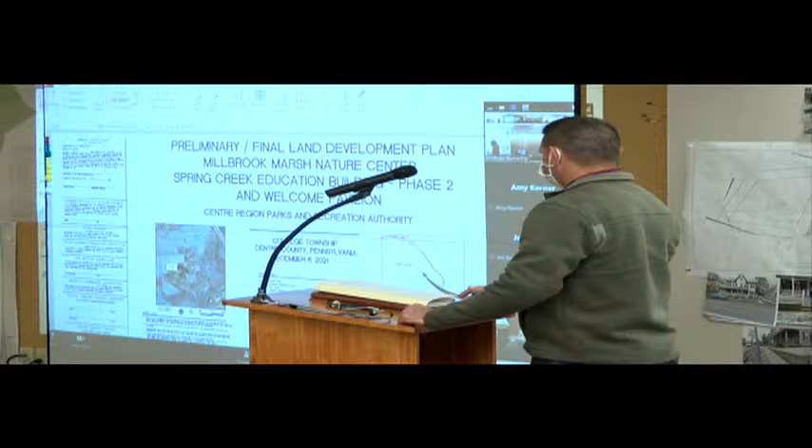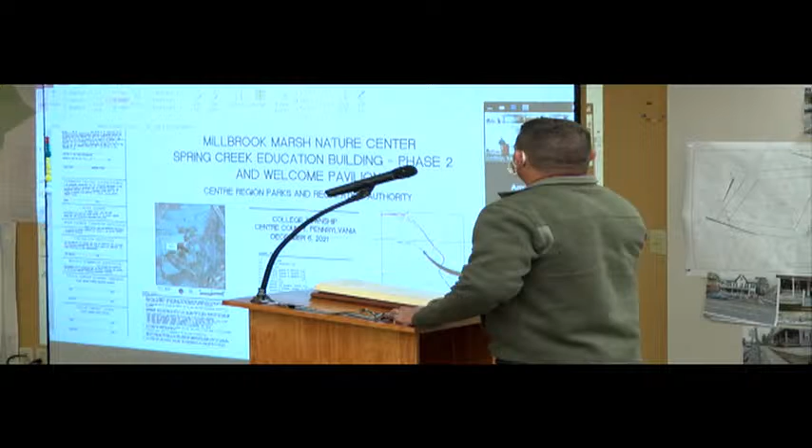I think everybody might be familiar with the project, but just a real quick overview. It's a phase 2 development of the Spring Creek Education Building at the Millbrook Marsh Center. It also includes the construction of a welcome pavilion that has some restroom facilities in it as well. The land development plan itself went in front of Planning Commission on November 16th.

And we did get some conditional approval through Planning Commission at that meeting. There were some additional comments that need to be addressed as far as the land development plan goes itself. We have made most of those revisions as recommended by the Planning Commission. There were some additional comments received on Monday from Lindsay that I went through and responded to today, sent that over to Linda, but Dawn said that information did not make it back into your packets for tonight's meeting, so I apologize for that.

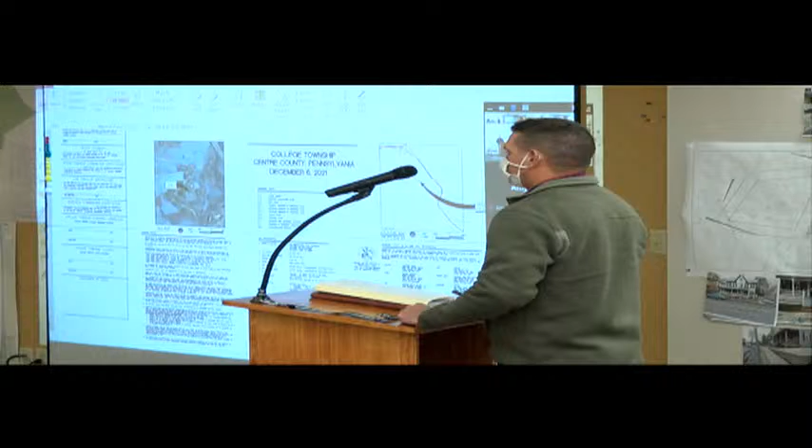There is one area, based on the recommendation from Planning Commission to Council, that we did want to have a discussion on, if possible, which would be the use of the trail surface aggregate on the trail network within the park. As it's proposed right now, the whole network throughout the Millbrook Marsh Center was approved as an alternate to the sidewalk requirement for the ordinance.

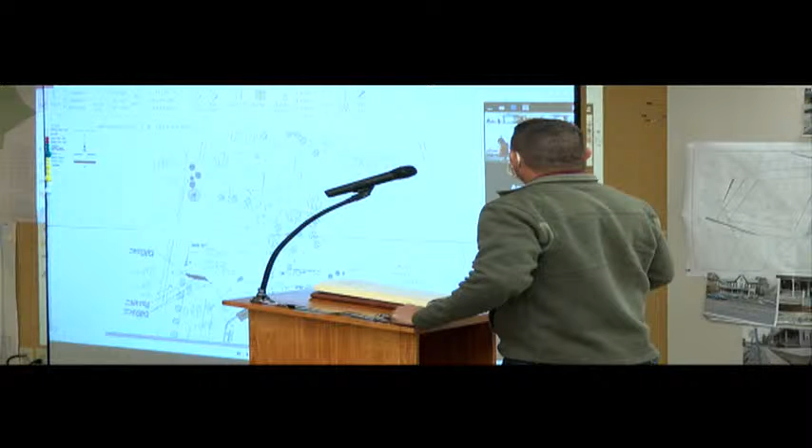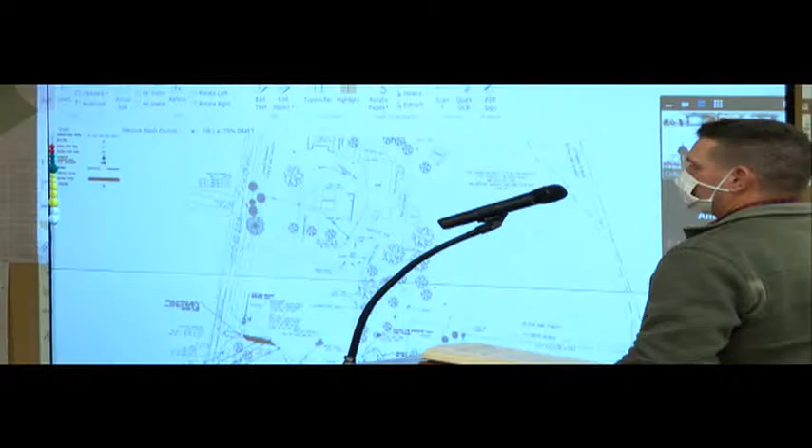Along with that, we were proposing to upgrade the existing trail leading into the Welcome Pavilion. There was a couple areas just on the north side of the facility, or the center itself, that had some grass growing through the existing trail. Basically, it's a maintenance item that we want to go through and upgrade the trail surface in those areas, as well as new construction around the Welcome Pavilion itself.

I know that Planning Commission had a strong conviction on that surface of the sidewalk being either asphalt or concrete. But we do believe, based on information that's been presented by Penn State's Dirt Gravel Roads Center, as well as some other technical bulletins, that the trail surface aggregate is an acceptable surface that meets ADA compliance requirements. That was a concern of the Planning Commission, as well as some of the hardness issues that I think lends itself to using asphalt or concrete.

So the TSA itself does, in our opinion, kind of fall in line with the requirements of an asphalt type surface. Like I mentioned, I know Planning Commission is recommending that trail surface aggregate not be allowable. But based on the Penn State Dirt Gravel Roads Center, as well as additional research information and technical bulletins, that should be permissible given the application for the Nature Center and the history of the Millbrook Marsh Nature Center as a whole.

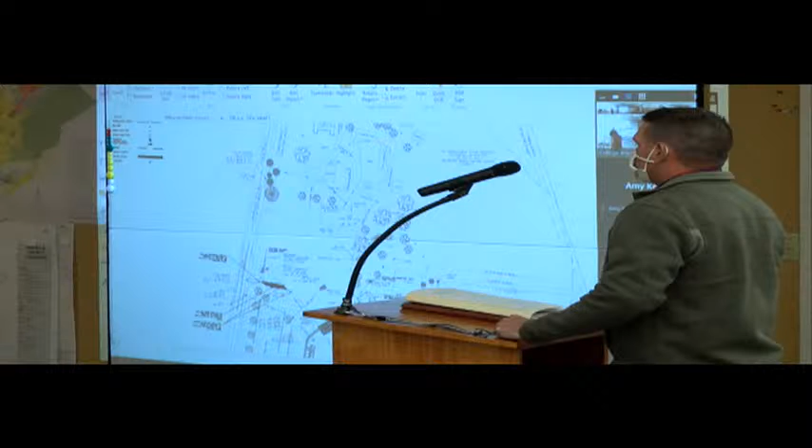But I just wanted to bring attention to the use of the trail surface aggregate. We're requesting that the plan be approved, making sure all comments are addressed as per Planning Commission, with the exception of being able to utilize the trail surface aggregate within the park itself as presented on the plan. So if there are any other questions, I'll be happy to try my best to answer them.

Okay Jeff, thanks. Adam, correct me if I'm wrong, this is the first time we're seeing this, right? That's the first time for council.

Jeff, do me a favor. Since this is the first time we're seeing it, we kind of focused on the items around conditional approval. Can you give us a very brief overview of the project? And then follow that up, if you could tie in visually the references here to where the sidewalk would have been required. So what you're asking for is the waiver, and where the alternate is going, which is part of the condition. And then I think you covered the aggregate part pretty clearly.

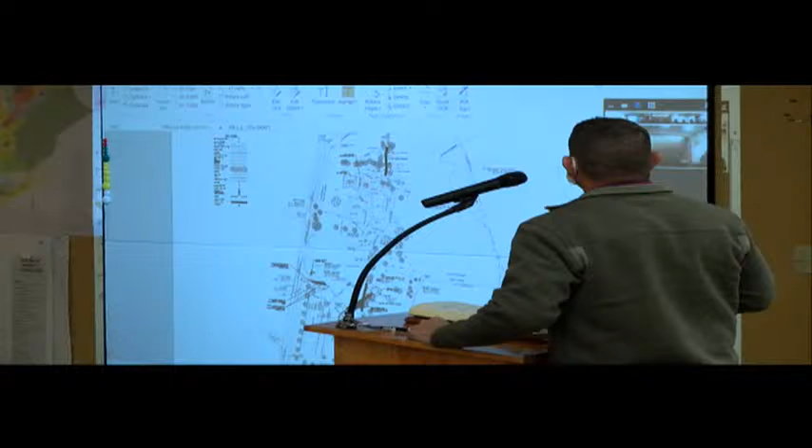Yeah, so as far as the overall project, this building here is the Phase 2 educational building being proposed as the main component of the project. A portion of this was already through land development as Phase 1, and for funding issues, that second building was not constructed at that time. So the main objective is constructing that educational building at the north end of the parcel.

Also included is the Welcome Pavilion, which has restroom facilities down adjacent to and just off the parking area that's already existing — this is a gravel parking area. The main portion of the center, Millbrook Marsh Center, which is not involved in this project, is pretty much centrally located on the parcel.

Connecting from north through south is this series of gravel trails — there's some just off the page. This ties into a wooden pedestrian bridge that's just adjacent to Puddingtown Road. So that trail network ties into that wooden pedestrian bridge, comes southward, goes off towards the Phase 2 portion of the building, also comes down. There's some other networks here in front of the barn, continues southward, and eventually ties into the existing parking area at the southern end of the parcel.

So along with building those two buildings, the other portion of the project includes utility runs to the Welcome Pavilion, and these dark areas are upgrades to the existing trail network. There's a section here leading into the Welcome Pavilion, an extension piece requested to tie to the end of the parcel, and this section up here would be a maintenance portion of existing trail to upgrade the surface.

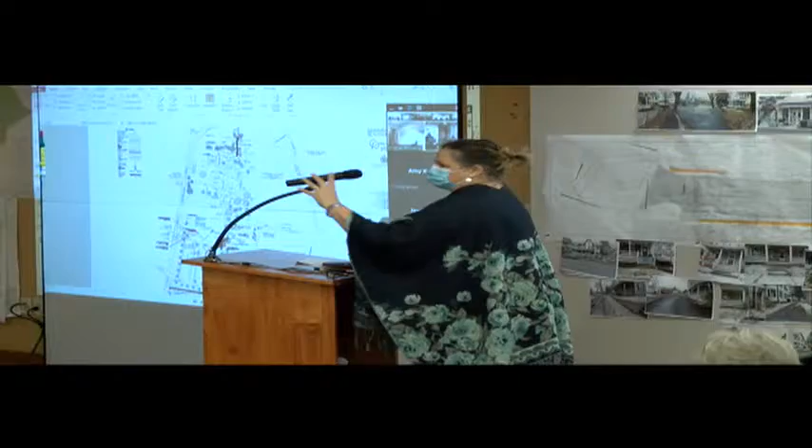I just want to add on to what JP was saying regarding maintenance. We do have to maintain the facility now in the winter months because we are a year-round facility. We have a gravel parking lot and our staff does clear that parking lot, and we do have to clear some of the current TSA trails there because they lead from the parking lot to the Spring Creek Education Building and the barn, which is where we have programming, sometimes in the pavilion in the winter as well. So we knew in this discussion leading up to presenting to council, we talked a lot about maintaining that trail from the parking lot across the bridge where it meets the shared use path.

We talked about how quickly we are going to need to react because we want to avoid snowpack. So we are prepared to maintain that, especially once the Spring Creek Education Building Phase 2 opens. We're going to have increased traffic there, increased use, so it is going to need to be careful consideration. Our team is prepared to handle that.

Okay, Kathy, anything? Ed, having heard the discussion, was it accurately captured, would you say? I'll need you to step up here.

Anything to offer before we open this up for discussion?

The planning commission looked at the linear square footage that would be saved and also the cost. If you went from the edge of their property all the way around Puddintown Road to the bridge with a sidewalk required by ordinance, the cost would be very steep. So we looked at the alternative path and said we wanted a hard surface, not concrete. They could do macadam, that'd be great. It won't really detract from the center and it won't detract from the marsh.

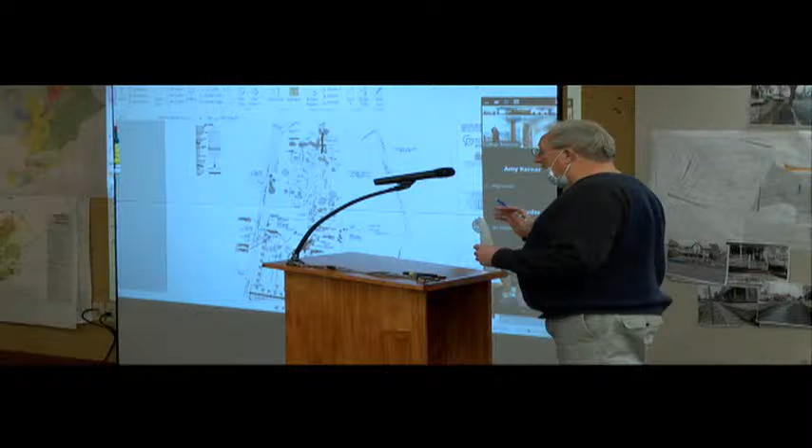Okay, Jeff, hang loose here while we open up the discussion.

I want to add one more thing that couples with what was just said. The concern I have, if required to use an asphalt surface, is we got E&S plan approval on Monday based on the use of TSA. That was submitted when the land development submission was made, and that came back on Monday. My concern is once we change the type of surface, it essentially changes—it doesn't change the use, but it now requires us to change and verify the design.

So we're at a 6-foot wide trail right now existing—that's why those upper areas are being picked and chosen for what's being updated by maintenance, because we're not required to do anything with design. Once we have to go to an asphalt surface, we need to look and verify design, which right now would mean going to an 8-foot wide minimum asphalt sidewalk. So, going back to the comment about saving costs...

I don't know if there's going to be a huge cost savings when we have to redesign and go with additional width for that trail network through the central part of the parcel. Along with that, we'll have to go back through E&S approval, and most likely planning commission approval, to make sure everything is up to design standard from that standpoint.

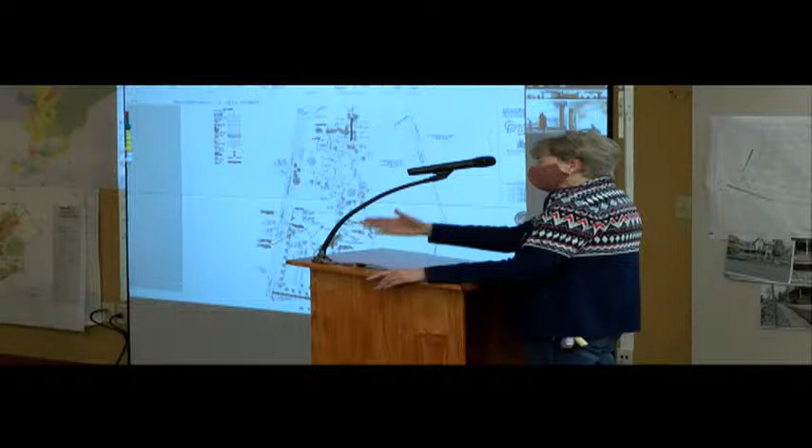I see people coming down on bicycles on Puddintown Road, and they pull into this little parking area and ride down. Do they come over the bridge and go behind the barn and continue out? Yes. I guess what I'm thinking is, from a consistency standpoint...

It would be nice to have a consistent connection between the shared use path out to Puddintown Road, closer to College Avenue. Right now, it seems like there's a disconnect in my mind. Once you cross that bridge, you're on a different type of surface.

And I see the direction both ways, right? People wanting to get out to Orchard Road, but also wanting to get from there to this new facility. So I'm kind of seeing it in both directions. And at the moment, it just doesn't seem like there's continuity, I guess.

That's my concern. Pam, go ahead. I think that people that live there understand, but I don't think somebody who's exploring would necessarily know that - people on bikes or other things, trying to figure out a way to get there. There really isn't an alternative, unless you stay on the road. But maybe because I've been there for 45 years, to me it's just a natural way.

Yeah, you have local knowledge of it. I'm just trying to see it from the perspective of somebody who just moved here and is looking around - they're gonna say, oh, you can't go any further. That's where I was kind of coming from. Well, the path kind of takes you there - you come out of the parking lot, there's a path, you come down the driveway, there's a path, and you follow the path, there's a sign that says trail. It's not hard to figure out, I guess is my point.

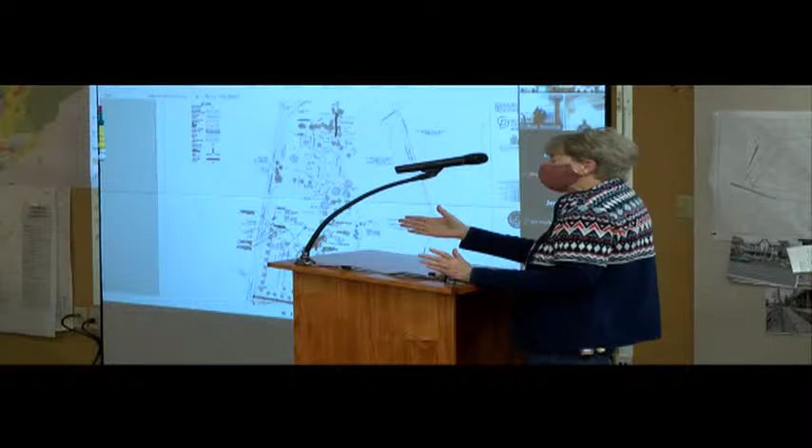Okay, thanks. Pam, did you have a comment that helped answer Paul's question? Yeah, just two points. When you do cross over that wooden bridge, you come back to some TSA that's there, it's a little grown in. That's shown on this plan to be improved, and then you're able to connect to the macadam of the shared use path. I actually ride from Lemont and come around, and ride down into Millbrook.

We also actually have people riding on the boardwalk, although you're supposed to dismount. So people are coming in across the boardwalk and then getting back on their bikes and riding through the TSA trail. So there is a connection there, and part of the requirement that's been asked of us, which we have no issue with, is we're improving the signage there. So there will be new signage at the end of that shared use path that will indicate this is the approved pathway through, so they can either come through or go back out by the boardwalk.

And is that gonna be right down there in the lower left? There'll be signage on the top end, which is not on your screen currently. I don't know, Lindsay, if you're able to pull that down. Yeah, I see - where that darker area is, that's the bridge, and the shared use path. There'll be signage there indicating people can come through, that is the approved pathway. Will there be signage at the bottom saying that you can get to the bike path from there?

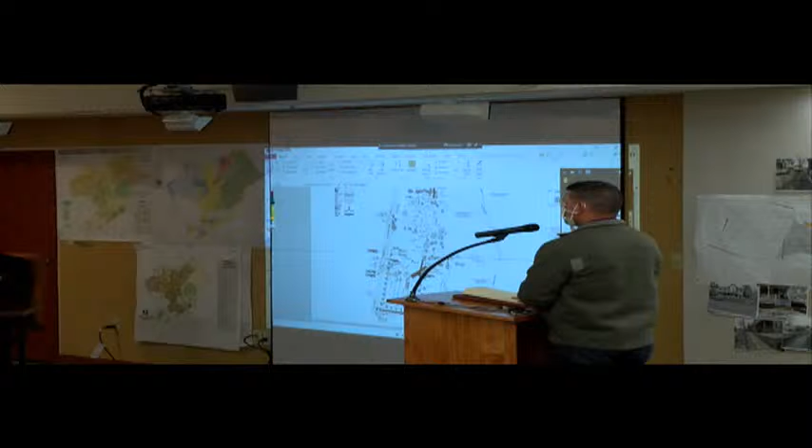Carla, sorry, I got a little emotional there, so I pulled it together. I just wanted to offer my full thought, which is that the two connecting streets, Cedar and Bathgate, if a sidewalk went from the bottom of this map up to Cedar and then pulled into the marsh, I think that would be the ideal path plan and replacement of an alternative sidewalk to the whole frontage on Puddintown Road. Does that make sense?

Yes, and let me ask a related question for clarification. For example, if we were to require—let me back up a minute—if we were to support the alternative sidewalk, we would be getting a 6-foot wide path through the site. If instead you were to build a sidewalk along Puddintown, it would only need to be 5 feet. That's correct, right? Yes.

So we're only trading requiring a sidewalk along the road, not a dual use path, to meet the requirement, it would be a 5-foot sidewalk. Correct, that's what we're asking to be waived. And in lieu of that, we're getting a 6-foot pathway through the site. I'm just trying to clarify the issues here.

Hang on, Anthony. What we're saying then is, if this council is requiring it to be a hard surface, like asphalt, absent a waiver, it would need to be 8 feet. Correct. Okay, just want to make sure we understand what we're looking at here. So we would then be trading a 5-foot sidewalk along Puddintown for an 8-foot sidewalk through the site.

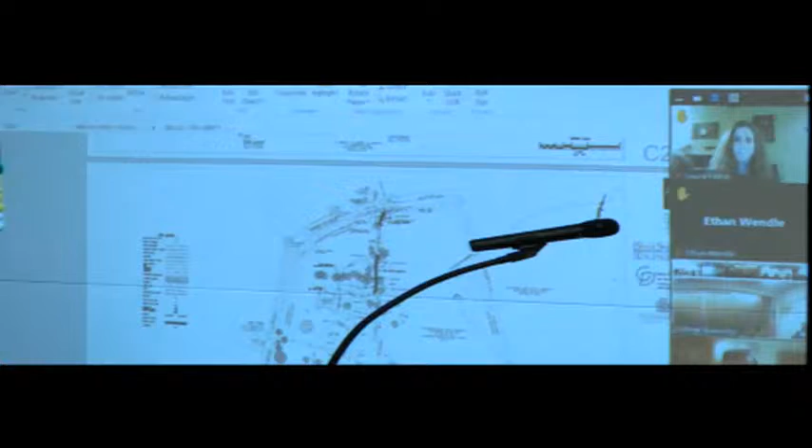So it's kind of awkward that I got picked first, because I too kind of wanted to hear from people who live on Cedar Lane in particular. So I do have some comments, but I will defer to them.

On the subject of hard surface, it makes zero sense for a nature center to pave. TSA is hard, I walk it, I bike it, it's fine. It's perfectly great for walkers, it's ADA compliant, it's perfectly fine for cyclists. Parks and Rec is already maintaining the existing TSA, so they'll just have a little more to maintain. They already do that, they know what they're doing. That's my comment on paving. Please don't pave anymore in the marsh, it doesn't make any sense.

On the subject of lighting, which we haven't talked about too much, I wish to express strong opposition to the Planning Commission's request for lighting at the entrance. Again, it's a nature center. It is bad for critters to have extra light at night. Not to mention, it will be invasive to neighbors. It will add light pollution in general, and you're using electricity for all of those negative things. There's already no lighting along the entire length of the Puddintown Trail, and it's fine. There are sections of the College Township Bikeway where there's no lighting, and it's fine.

Finally, about the proposed route in general. Broadly speaking, and again, I defer entirely to the residents of Cedar Lane, so I may be speaking out of turn here, but I just want to echo what Carla said. We didn't plan this, I actually started the meeting probably thinking otherwise.

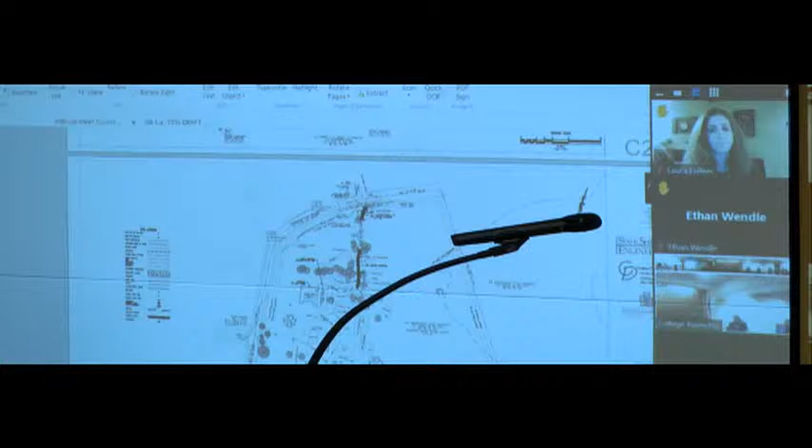Okay, thank you, Scott. And before we move on to the next person, just a clarifying question. The lighting at the access points, are they bollards? There are requirements in the ordinance that consider zoning districts, and this class is specific to the open space zoning district, so it considers the environment they're in. They have a maximum lumens, and the maximum pole height in this case is 20 feet, so nothing over 20 feet.

Okay, so we're talking about a pole that would be as high as 20 feet at the most. With a max lumen, and obviously they'd be full cutoff, correct? Full cutoff, max lumen is 60,000. Then there's light trespass, pre and post curfew, which are 0.3 and 0.1. And then there's a uniformity ratio, which Don could probably explain better, and then a minimum maintained average illumination of 0.5.

And did I hear you correctly that this body has the ability to downsize that and still meet, or that those are minimums? The only minimum is the maintained average illumination and the uniformity ratio. Those are minimums. The other, light trespass, lumens per acre, and maximum pole height, those are all maximums. Okay, but we also have the ability to waive it in entirety, and that's what the plan came in at originally.

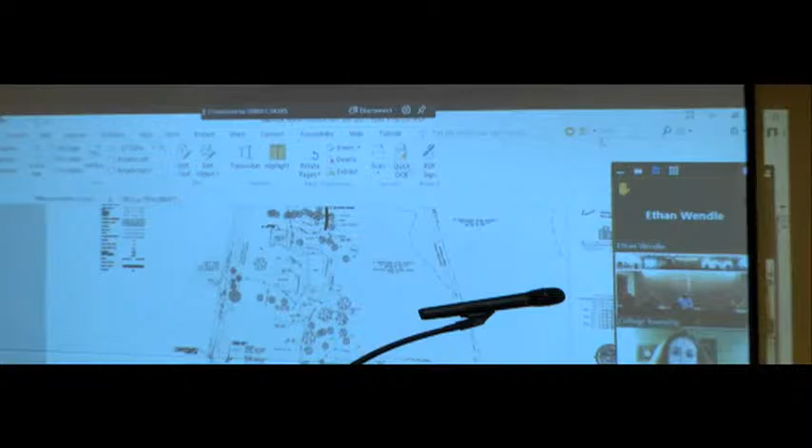Okay, Mr. Wendle, are you still on board here? Yeah, no, I'm here. Sorry I missed when you called me, but I wanted to hear Laura first anyway, since there's a bunch of houses in the Bathgate Loop that would be significantly affected. So my comment - I live on 314 Puddintown, just south of where this map runs out.

I'm very familiar with trying to get from my house, or anywhere College Avenue-ish, to the bike path. I've looked at some of the drawings for potential connectors into campus. There's a section of road I own there that I intend to someday build a sidewalk to Puddintown Road, as part of my planning, so I can be part of this process. I think the township should really focus on maintaining continuity to the bike path, so it runs the whole way to College Avenue and eventually into campus, if that's part of the designs. To have something break that up would be a big miss, especially on such a huge section here.

I have a couple other points. I'd second Scott's points about the light - I don't see a need for it, and I think it just adds light pollution. It doesn't bother me; Laura and the people on Bathgate may have a concern about crossing there at night, but from my standpoint that's not the case. I did have a question regarding the material - is the trail surface aggregate the same material currently used in the marsh for the sections of path that are there?

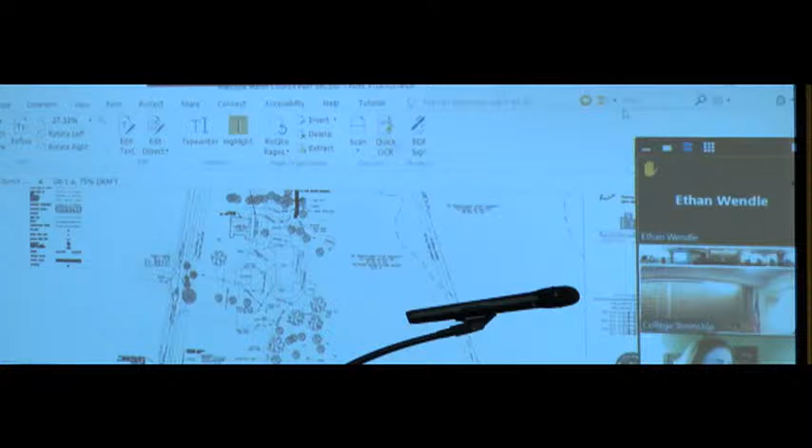Depending on the answer to that, my comment would be that what is currently there in path form is highly prone to water washout. It gets ruts in it. My kids fall on their bikes every time they try to ride there - they ride off the pavement, hit this gravel stuff, and just collapse. I've had to carry them home several times because of that. So it does not produce continuity between the bike path and anything else. My strong vote would be the route that Carla suggested, which I think accommodates the many houses in the Bathgate Cedar Loop. I'm personally fine diving into the marsh and saving some cost by utilizing the existing path there, but a hard surface would be my vote, simply because I'd want to push for continuity with the bike path.

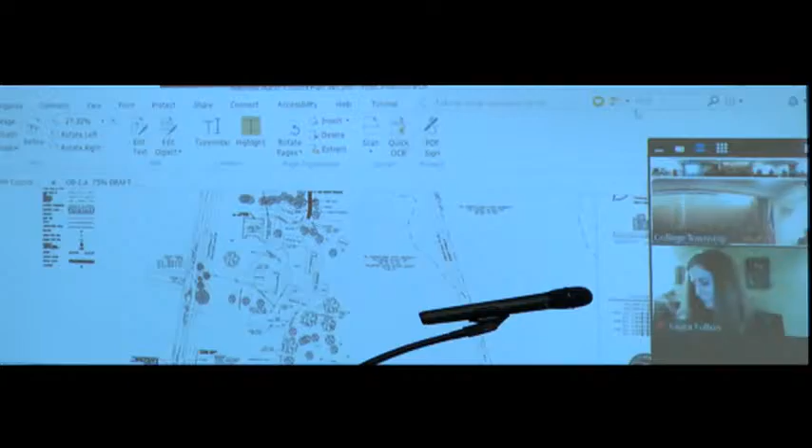Okay, let's get a quick affirmation of what I suspect, and that is that under the proposed surface, at a minimum, it would be much harder than what's in there right now. Correct. Is some of that the older AASHTO number 10? It probably is, I don't know. What he was describing sounds like AASHTO number 10, but I don't know that for certain. So is it fair to say that even if we didn't go with asphalt, what is proposed would be significantly harder than what's in there now?

Correct. And it wouldn't mush up, or you wouldn't have the issue that he's describing? I would say no. It's going to be a maintenance deal long-term, but initially it would be much better than what's out there.

Okay, Ethan, did you get that? Did you hear the answer there? I did, and that makes sense. Not knowing exactly how the maintenance of that is going to shake out, I would still have concerns, and I think personally we'd want to keep continuity to the bike path. But I don't understand this material, and if it's as good, I certainly have no reason to want to cause the marsh to spend more money if it's unnecessary.

Okay, all right, you guys know me, my goal is always to get unanimous consensus on something. Didn't think it would be this hard tonight, but let's give it another go. Having heard what you've just heard, Anthony or Paul, any revisions?

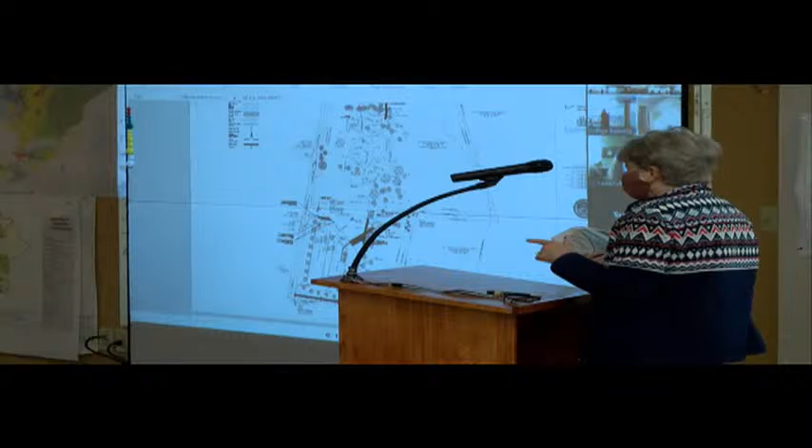Thank you. All right, let me ask the question I didn't think we'd have to ask tonight: where are we with the time limit on this land development plan? Do we have, in the required action timeline, another council meeting within that timeline without requiring an extension? Or asking for an extension?

While you're looking that up, the reason I'm bringing that up is this is the first time we saw this, and I sure didn't anticipate we'd have this level of disagreement between council members, planning commission, and so on. I would not be uncomfortable doing what I generally don't like to do, and that is to consider a motion to table this so we can look further into the lighting issue, which seems to have come out of nowhere. Maybe get more information on the options for the surface, think a little more, maybe get out there, take a look, maybe listen a little more to the residents, and bring this back.

If we did that, would we need an extension? It expires - the action deadline is January 16th, so you do have a meeting. We will have a regular meeting after the reorganization meeting on January 3rd. So council will meet again in regular session before the deadline of action. So you could table and reconsider on the 3rd.

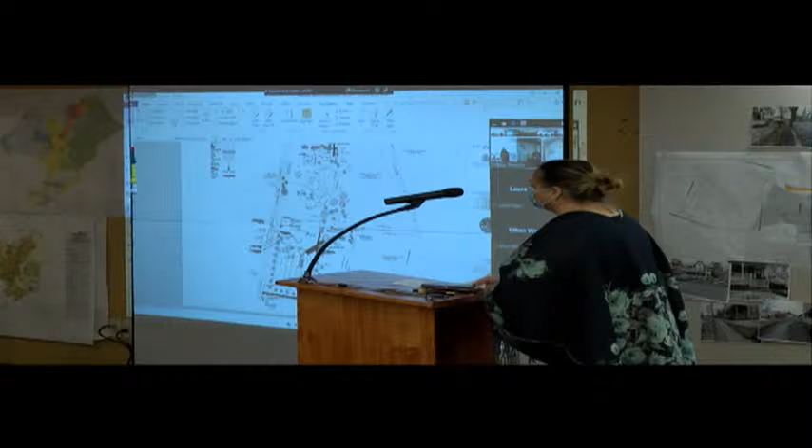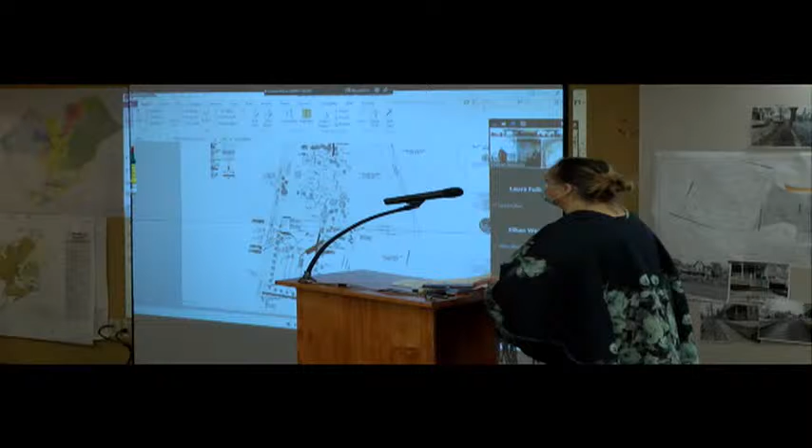So Pam, the way around that is, if you would be willing to consider granting us an extension for the review, we could then accommodate that at the 20th as well. But we would need at least a 30-day minimum, oftentimes they're longer than that. If you would consider granting the extension, we can extend the amount of time we have to provide an approval. I'm sure we can work that out.

I think we need a little bit more time to be able to bring some more alternates and address all the conversation tonight, so we'll work on that. Thank you. Ed?

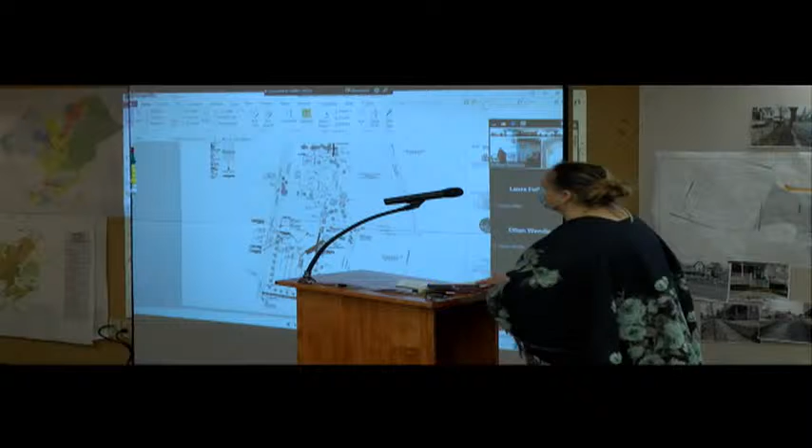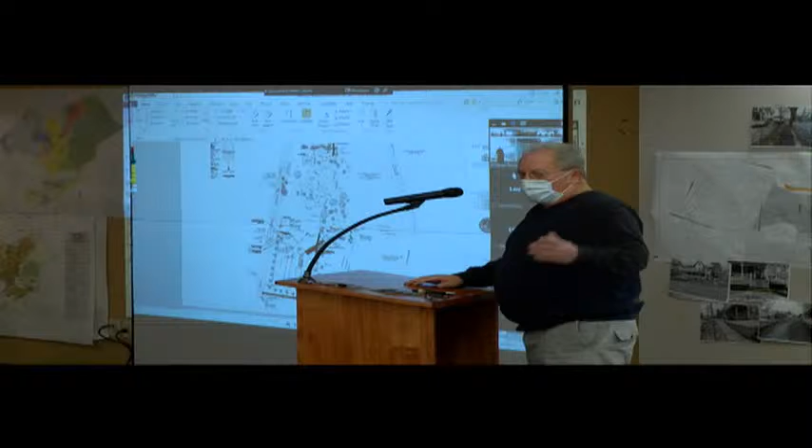One of the comments that was made about the alternative of putting a sidewalk from Bathgate up to Cedar was safety issues. If you drive Puddintown Road, it was made the comment you can't cross the street at Bathgate, and that could be a real problem.

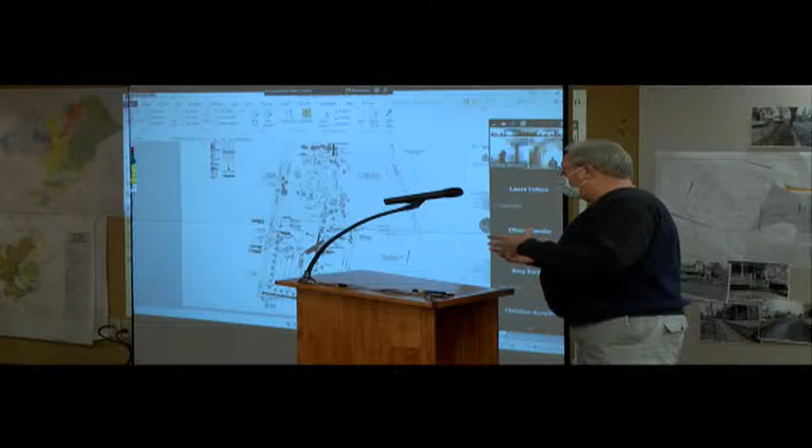The Planning Commission did look at that, and that whole area there is a safety concern. If you put a sidewalk in anywhere there, even when you come out right here, you can walk up the grass on that side of the road, but once you get up to Lenore, there is nothing you can walk on the other side of the street, because it's all riprap and everything else. So even putting a sidewalk along their property, out on Puddintown, you do have a safety issue.

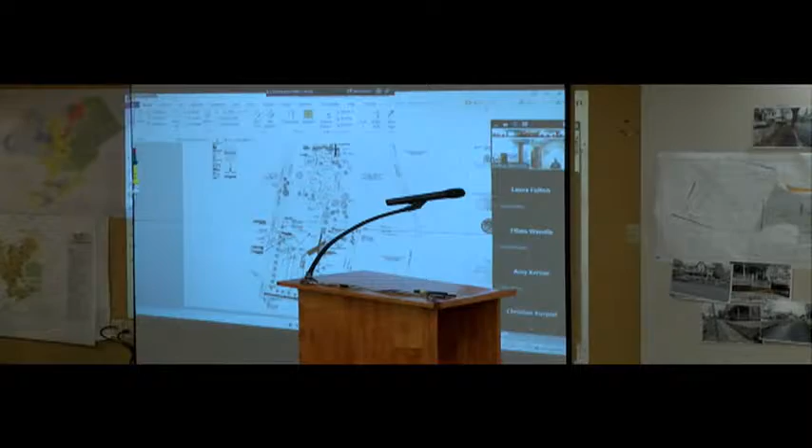Okay, thanks Ed. More food for thought before the 20th. If there's no further comment or question...

Don suggested that between now and the 20th, if we don't get a lot of snow on the ground and ruin everything, maybe just meet with Jeff out there. We'll take a look around, staff and the design engineer, and walk around and see what makes the most sense.

Homework. Rich? Yeah, just if staff could look into more definitely defining the entrance lighting requirement. I mean bollards, I think that needs intent.

Yeah, an entrance, something low profile, but just sort of delineates this is an entrance, versus just a dark turn somewhere along.

And this, all I can, I'll put my day hat on, we have them at each of our entrances. What a difference. I'll point to the Hills Plaza, the entrance off Branch, before they lit that to where it is now. And we are inviting people to this, for more than just a nature center, and we need to—they do have nighttime activities, yeah.

Yeah, so there is more to it than just the nature center anymore. Now if you wanna talk solar lights and all that good kind of stuff, yeah, that makes complete sense, but if staff could sharpen the goal on that one, that'd be great.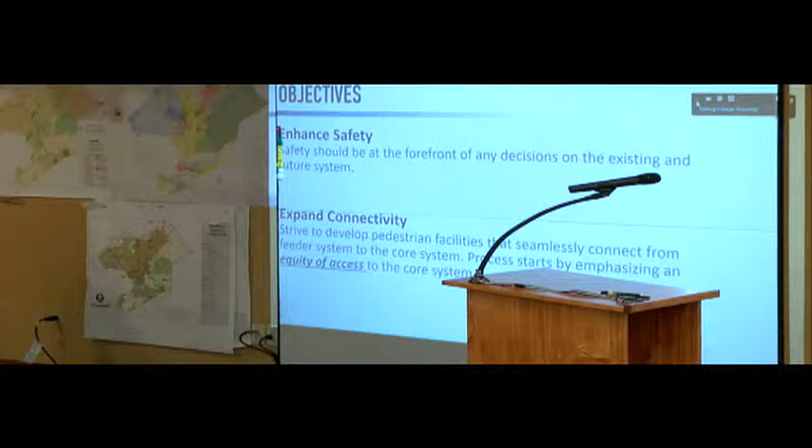Like the only way you think about it for pedestrians, exactly. Okay, I just didn't want to use those terms. Well, no, but it makes all the sense in the world to use it here for the same reasons it does with roads, streets. And in the plan — I'm still kind of hanging meat on the bones with the plan — but you'll see I relate that system to a watershed. Right, the feeder system is actually your headwaters.

Yeah, well, my question here is, we're not really talking about connecting feeders to cores, we're talking about developing feeders and cores. So should it say, using a feeder/core system to seamlessly connect people to the destinations? Because if you read this literally, it just talks about the middle piece. Right.

It talks about developing something that connects feeders and cores, and everything in between. Secondary is what I see here. Is that what you're talking about? Yeah, what's the middle term? Secondary. So if you read that, we're literally just talking about developing secondary. But what we really want is all three, to make the needed connections to the destination. I see the point, I can wordsmith that, that's not a problem. It might just be semantics here.

All right, we good? I'll keep rolling. Okay, mapping, and this is gonna be hard to see on the screen, I can already see that. Should we turn the lights down? Yeah, we can, which one is it? Third from the bottom, turn them off. That help a little bit? Let me do this, you'll know I'm in trouble. I was watching over there too.

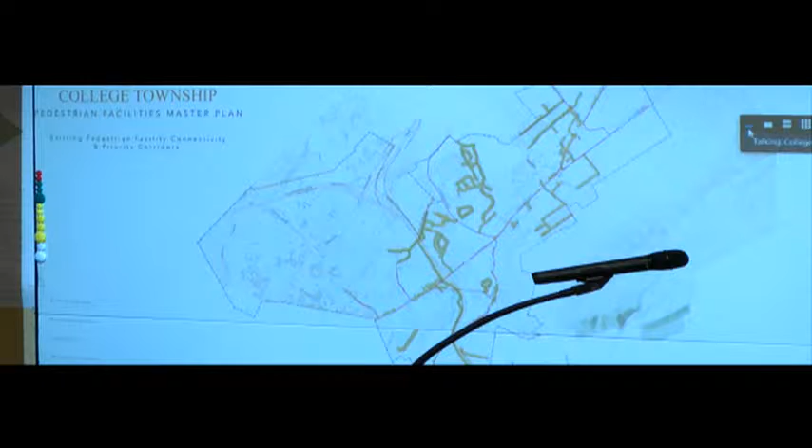Mike, real quick, is there any chance the website would show up better here? I think it's a projector issue, more than anything. It just washes out bad on the projector. Turn that computer around and open it so they can see at least. Well, we have it, don't we? Yes. Can you see it on yours? I'll get there real quick with the website. I don't think it's going to make much difference, honestly.

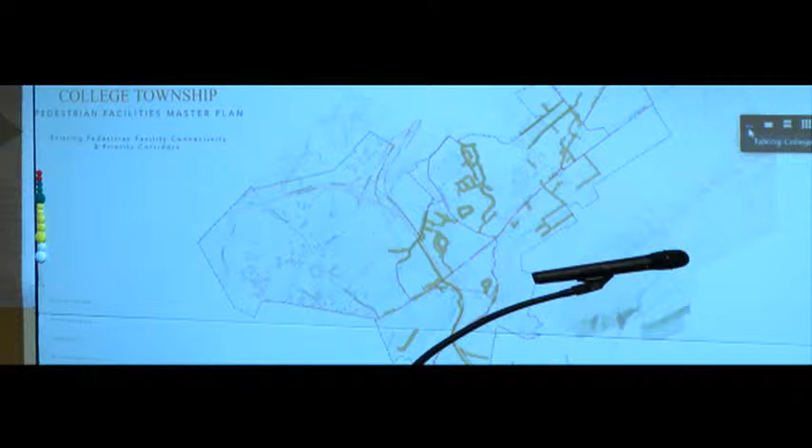So those first two maps really dealt with existing conditions: what's there, what the issues with connectivity currently are, and what those primary corridors were. It was just echoed with the demand we got from the public, which said look at these corridors, and they correspond directly with the priority corridors. 25% of all comments we received were in the East College Avenue corridor, 22% were in and around Lemont, particularly Pike and Elmwood streets, 14% Branch Road corridor, and 10% were in the Houserville area, including Houserville Road and Puddintown, a lot of it trying to get access to the school.

And 6% were around Dale Summit, and that deals with Benner Pike, College Ave, and Shiloh, that kind of V that we deal with out there at Dale Summit. So no surprises there, but it just put an exclamation point on it. What Shane did was a heat map to kind of emphasize that. So where you see that dark purple start popping out on the screen, it doesn't really show up out in Dale Summit so much. But anywhere you see the dark purple is telling you there's a lot of interest in some type of facility expansion in those areas. And again, that just emphasized those priority corridors that we talked about.

So getting to network classification, moving that next step up the ladder. This is where we're talking about breaking down the overall system into classifications. The core system, those are your highest pedestrian volume areas and are likely part of the user's commute between destinations. So this is where they're basically trying to travel throughout the center region, and these are the corridors they're using. The secondary pedestrian facilities, this is that intermunicipal connectivity - the connective tissue of your network, and honestly maybe the most important, because it's linking that core system back to the feeder system. So they provide linkages between neighborhoods and linkages between existing systems. And then finally, the feeder system is your intra-neighborhood connectivity. It's typically your lower volume usage, primarily people circulating within a neighborhood to go from house to house and or house to a park, those kind of connections.

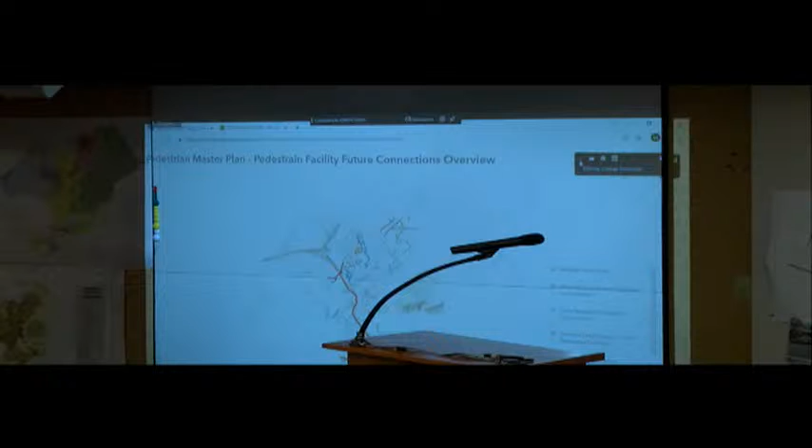And here's one more thing. Drum roll, please. So there's that map we just talked about with the existing conditions and classifications of neighborhood. And this is staff's first attempt. Dun, dun - there's your core facility related to those primary corridors.

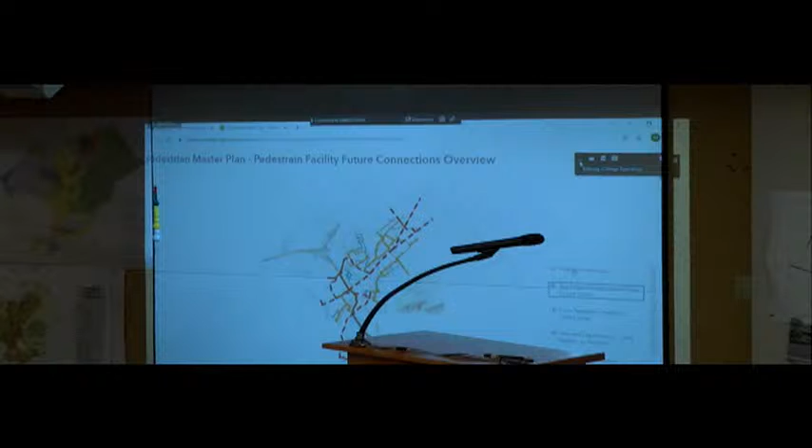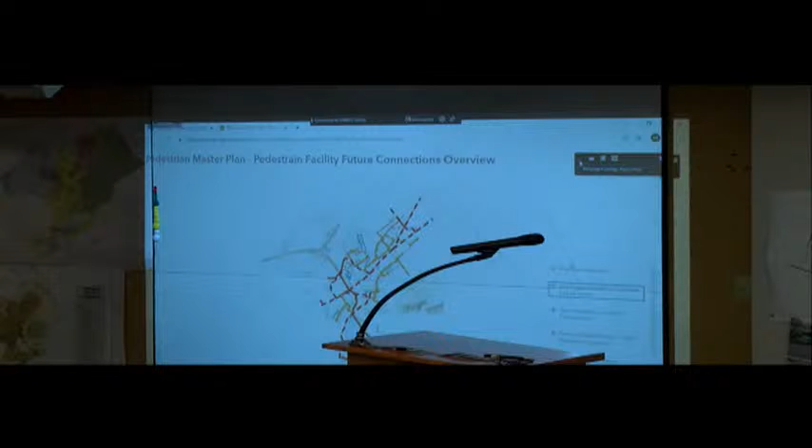Starting to put together our secondary network. And then we also recognize, and it's not on there yet but it will be in time, there are barriers - obvious barriers, some that we can still get past and some that are insurmountable. So we did throw a couple potential greenways in there as well to try to circumnavigate around some of those barriers. This is really one of the ones I want you to take some time and digest.

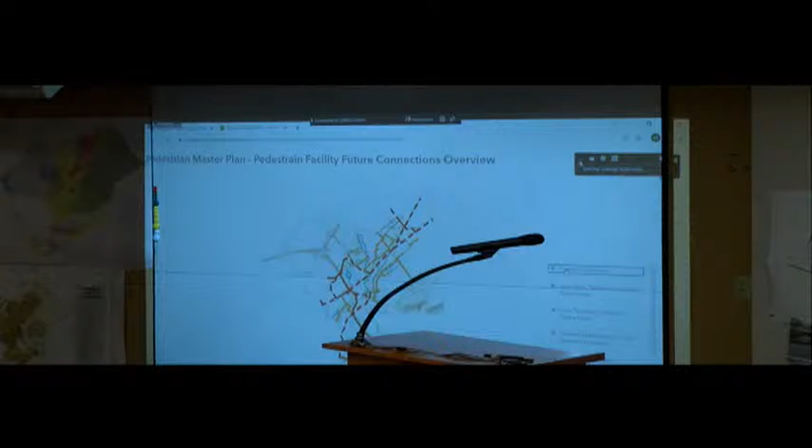And look at, see what we're doing, and again, it goes back to that concept of, does it make sense from classification levels and in terms of making those interconnectivity into neighborhoods and trying to raise that level of service in each of the neighborhoods to get to at least a base level of well-served for each of the neighborhoods that's out there. You'll see the Penn State area is kind of its own little void - we didn't want to presume that we would be able to do a whole lot on Penn State land. But certainly if there's opportunities for us to collaborate with Penn State, we'll investigate those.

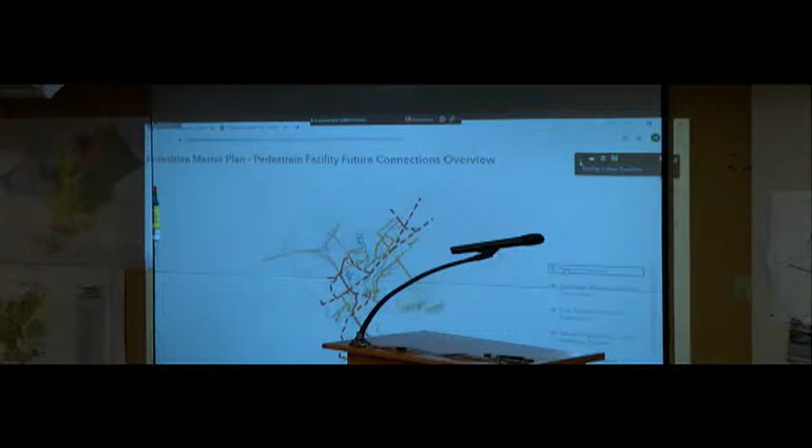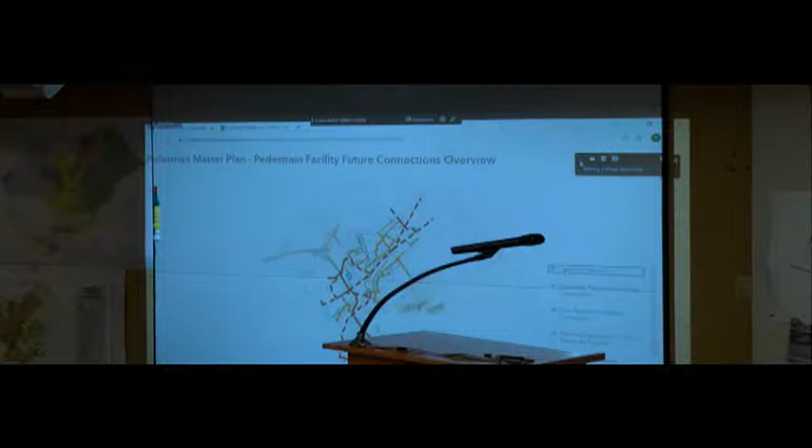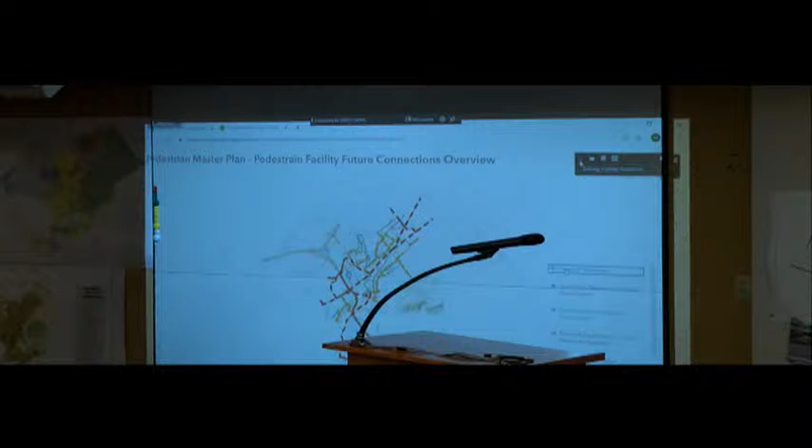But this will come to you in an email, probably tonight at some point. This is your holiday homework. I'm going to again ask you to take a little time, particularly this map, and digest it, and that series of maps building to this point. If you think this makes sense or there's things you want to see us add, that's a discussion that we want to have in January as we continue to build out this plan with that goal of 100% plan on the 20th. So that's what I have for you tonight. I appreciate your patience as we walk through it.

But I couldn't ask for a better segue than the 2 hours we spent at the first part of the meeting, because that was exactly the level of discussion this is starting to move towards. The segue didn't have to be 2 hours, but it was. General questions for Mike before we let him go?

Paul? Can I ask just a real quick question? I love the greenway thing in the end because there are those barriers. Maybe integrate into the report some of those, just so that they're documented. Because we're looking at these like, here's the potential, but we know, for example, the narrowness of College Avenue, once you cross over, you've got really limited space between the road and a pretty steep slope.

Those are the kinds of things that I think, as I said, this is an evolving document. When we come back and have more time with Shane, we're going to give you another map that shows this with the barriers, and how we're trying to work around them. Going back to my relation of a watershed - think about how water flows. If there is a dam in the stream, it's going to find its path of least resistance, and that's what we're going to try to do with this plan.